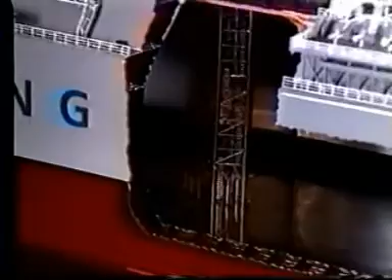For the last 30 years, Gaztransport and Technigaz have gained the reputation of leading specialists in naval engineering for the transport of liquefied natural gas, LNG. Today, it's the only company in the world able to design membrane-type methane carrier tanks. Through constant efforts in research and development, GTT have continually improved these systems both in terms of performance and reliability.

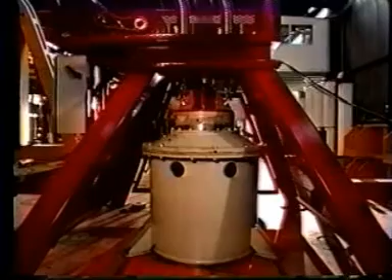To further technological development, Gaztransport and Technigaz conduct numerous laboratory tests. These tests, performed in different specialized centers, one of which is part of Gaztransport and Technigaz, evaluate the characteristics of materials and the partial assembly used.

Due to the transport temperature of LNG, -163 degrees centigrade, it's essential to test the material in cryogenic conditions to check their mechanical and thermic characteristics as well as their behavior at very low temperatures.

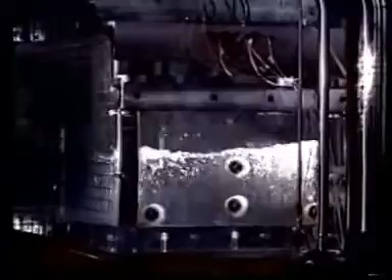Other tests are conducted on reduced scale models to simulate the motion of liquid in ships' tanks, thus providing a closer evaluation of hydrodynamic forces on the walls. By taking these results into account, Gaztransport and Technigaz can optimize the design and quality of membrane systems as well as their implementation.

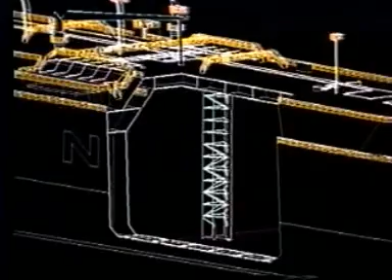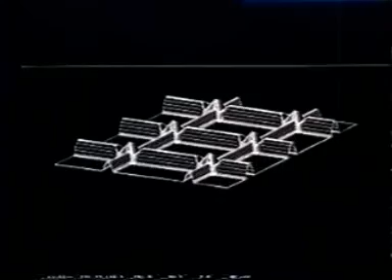In the membrane tank concept, the double-hull ship structure is used as a basis for a tight, heat-insulated cryogenic lining. The membrane gives the tank its impermeability to gas and liquid, whereas the load-bearing insulation system transmits the LNG loads to the hull and limits the cargo boil-off rate. Gaztransport and Technigaz have developed two membrane systems based on this concept which use different types of materials.

This is the NO96 system. On completion of the ship's double hull, the tanks are equipped and set up as full-scale all-weather workshops. To allow for access along the walls and ceiling, the first step is to erect scaffolding in each of the tanks. It has several levels, allowing vertical and horizontal circulation, and there's a wide storage and handling area on the floor of the third level, which is directly accessible through an opening in the ship's hull.

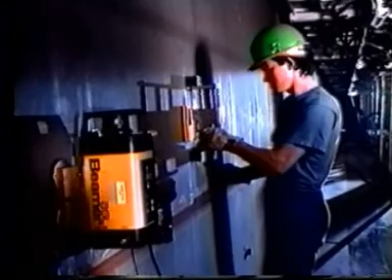Very precise topographical measurement of the inside surface of the tank, as well as of the defects in flatness, is carried out with laser equipment connected to portable computers. The coupler bases are positioned using a laser sensor. They're then welded by an automatic welding robot.

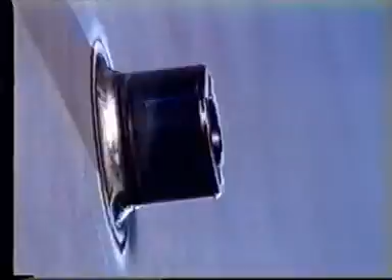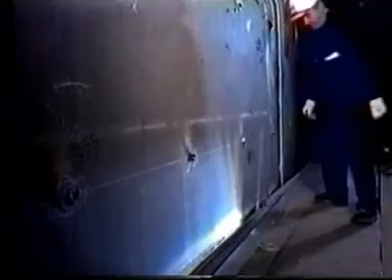The coupler bases represent the mechanical bonds of the NO96 system. They're fitted in a rectangular 1 metre by 1.20 metre grid. On the basis of the dimensional survey taken previously, the defects in hull flatness are compensated vertically at each base by fitting reference wedges from 4 to 15 millimetres thick, which have been calculated by computer. In this way, an ideal surface is obtained using these reference wedges, which smooth out any hull deformation and serve as a reference for the fitting of boxes.

Along the tank transverse corners, 8 mm thick anchoring flat bars are welded to the double hull. These bars transfer induced tension to the hull in each of the metal membranes.

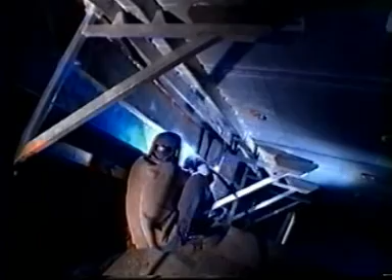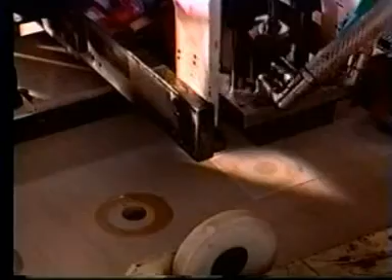While all this is happening, the prefabrication of insulating boxes has begun. These plywood boxes are assembled to very precise specifications by a highly automated industrial woodwork manufacturer. Staples are used for the assembly. The boxes have inside partitions which give them great mechanical resistance.

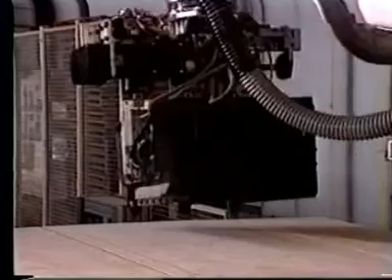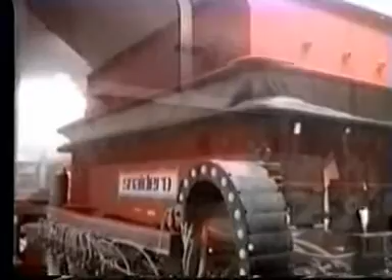The boxes are then filled with perlite, an insulating mineral powder, and vibrated before being closed up, packed and sent to the tanks. These boxes represent the insulating part of the cryogenic system.

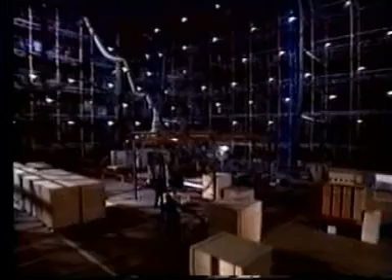Before assembly, resin ropes are applied on the back of the secondary insulating boxes. This operation is performed by an automatic coating machine which calibrates the ropes and puts them precisely into position. Rope thickness varies between 10 and 20 millimeters.

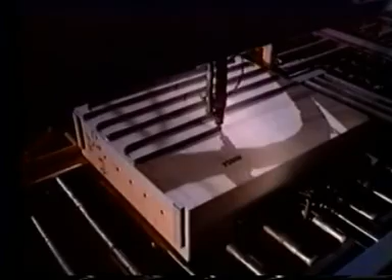The resin ropes are flattened when the boxes are put into place. They compensate for any level differences and balance out the bearing loads of the boxes. A kraft paper foil is then applied to these ropes in order to stop them sticking to the steel of the double hull.

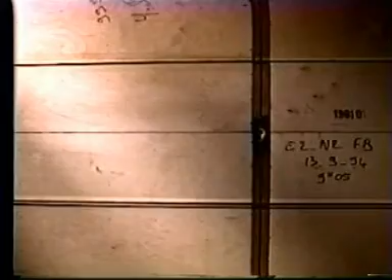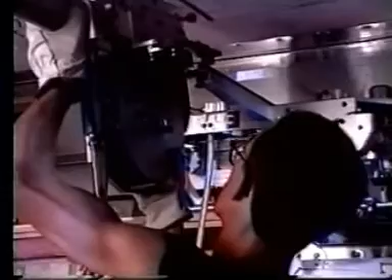The boxes have a T-groove on their surface every 500 millimeters, into which a continuous metal tongue is placed along the length and width of the tanks. The tongue is made of invar material, 0.5 of a millimeter thick.

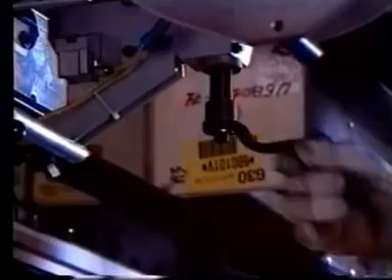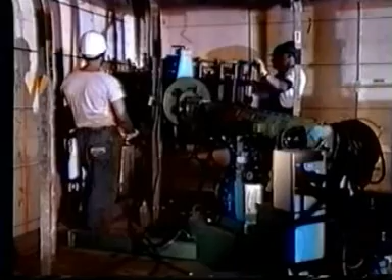It's automatically and continuously unwound, folded into an L shape and inserted into the box grooves. This is the mechanical bond for the secondary membrane strakes. The tongues guide the positioning of the secondary membrane strakes.

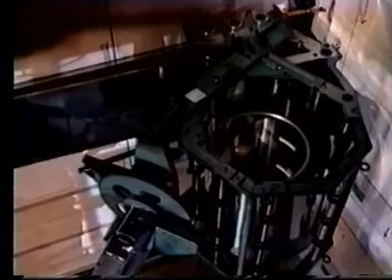As for the strakes, invar strips 0.7 of a millimeter thick are delivered in coils which are automatically and continuously unreeled and unwound along the length and width of the tanks. When the invar strips come off the reel, the edges are folded and lifted up at a right angle to make 500 millimeter wide strakes.

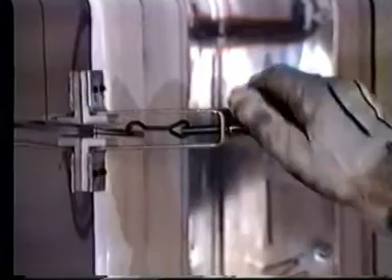These fit perfectly between the two adjacent tongues, equipped with temporary guides to make the unwinding easier. The strakes are held in place along the wall by means of temporary devices consisting of a hook anchored in the eyelets cut in the tongue.

The strakes are then flanged into position by tack welding onto two adjacent raised edges on the intermediary tongue. This operation is carried out using a light automatic resistance welding robot.